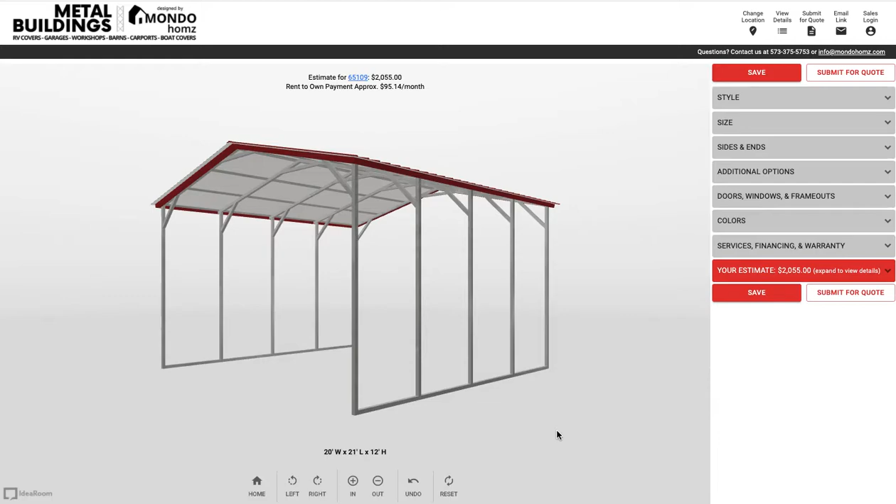Today we are going to build a 30 by 40 garage. Let's start up here with style. We can just start with a garage here, and it'll automatically populate a garage with 2 doors and a walk-through door. It automatically populates 24 by 26 by 9 - 24 wide, 26 long, from front to back on the roof.

Now, we have a 6-inch overhang on the roof, so the footprint is actually 24 wide and 25 deep. Let's change a few things about this garage. First, we want to make it a 30, so let's go to 31. That gives us a 31-foot roof measurement, which gives us a 30-foot footprint measurement. So it's a 24 by 30.

Actually, you know what? We said 30 by 40. So let's go to 30 wide, 41 long. That puts us at 30 by 40.

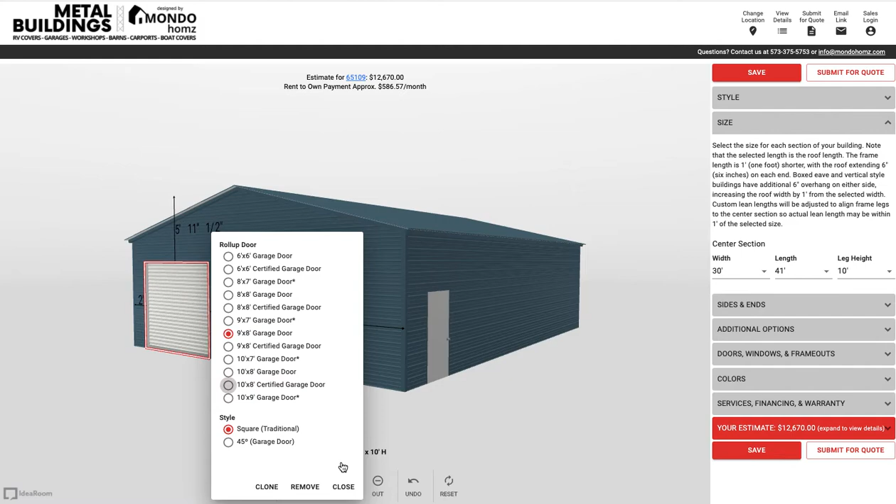Now I want to change the eave height on this. Let's go 10 foot, so we can change these doors to 10 by 8 certified doors. Okay, close. And then 10 by 8 certified door. Now we do the 10 by 8s, but we actually need 2 foot on the eave height for that certified door to make the header correct.

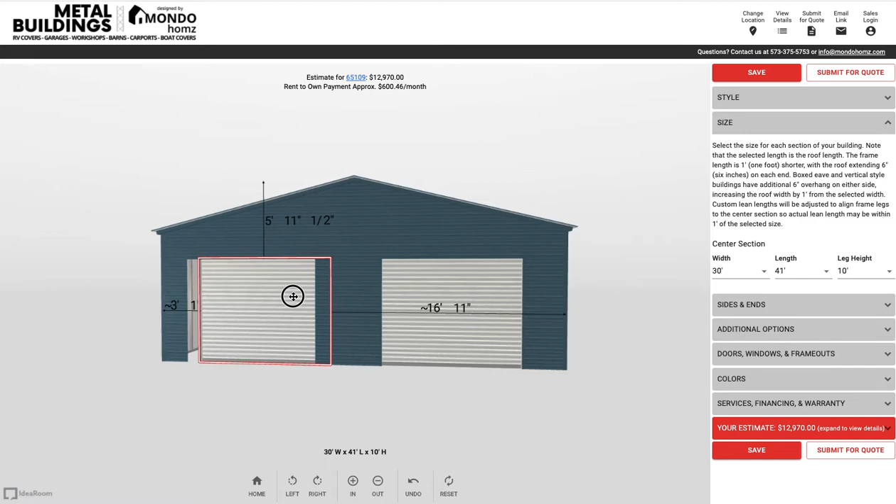I'm going to put, let's see, let's do 3 foot here, 3 foot and 3 foot spacing over here. So there we go, and we're going to keep that door there.

Now let's put some windows on the side here. Let's put one there. Normally when you do this, it automatically populates the window in the center, which is okay. Let's put a window on this side, and let's put a window on this side, that way we have good cross ventilation.

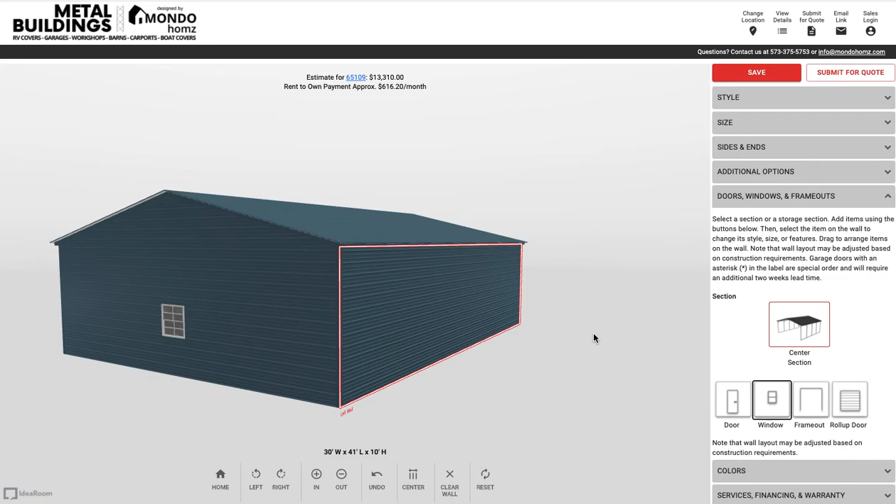Okay, so now, here we are. Oh, this thing is kind of getting wacky on me. There we go. Okay, so now here we are at the 30 by 41 by 10.

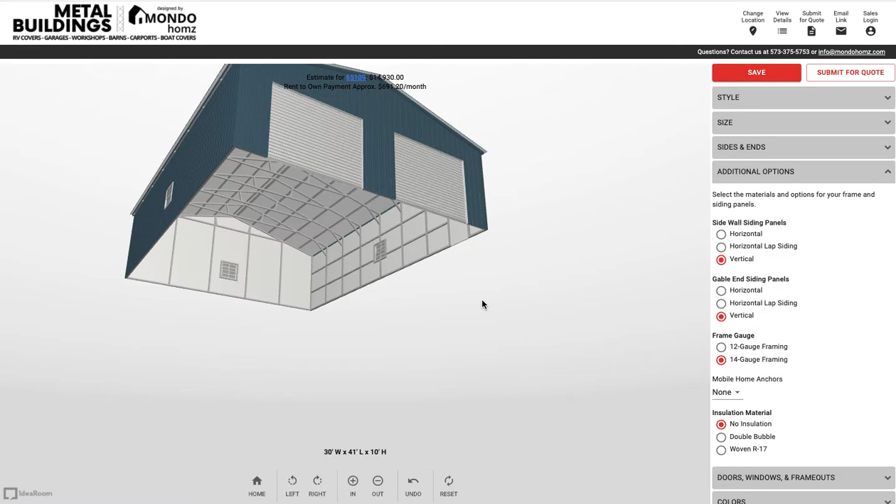But you know, I always like the vertical siding, I like how it looks. If you look on the inside of this building, in between the uprights, there is no purlins, but when we change it to vertical, those purlins appear. So you get more framing when you do the vertical siding as opposed to the horizontal siding. I like the look of the vertical siding.

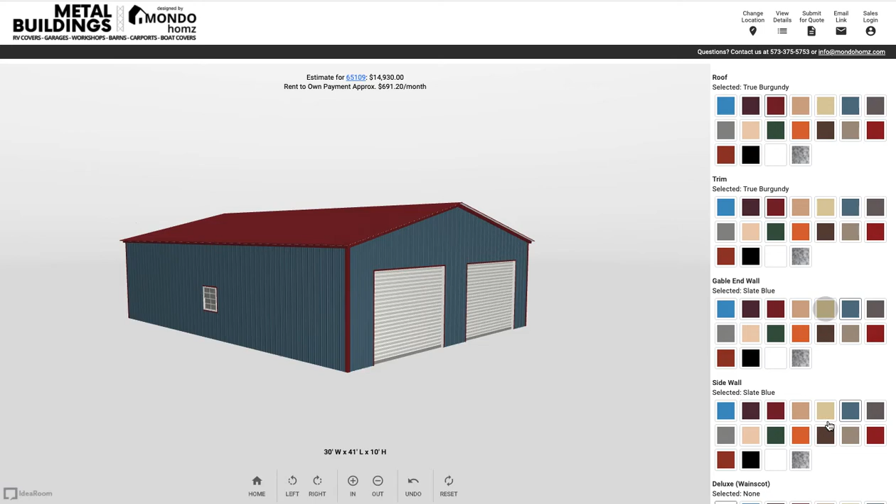Now let's go in and change the colors. Let's do - I like burgundy - and let's go with a sandstone and sandstone. And then something that looks really nice is adding the deluxe wainscoting, so the bottom has the wainscoting there.

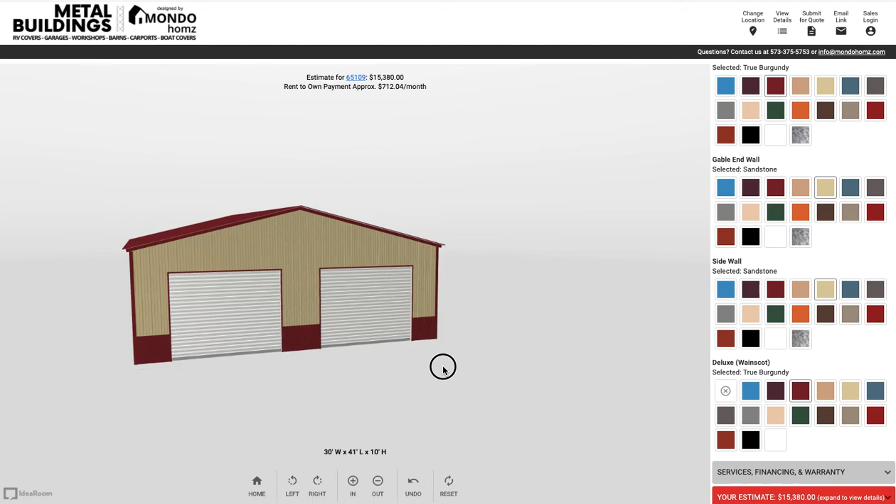And here's our building. You can see the door, the windows. It was a pretty simple build, and the reason it was simple is because we had the style up here, that garage style. It makes it really easy to build garages in here.

And you can skip around, you can go to the size, you can change the size, you can put lean-tos on this. Now, I've shown you in the past actually certifying a building, but all of our 30 wides, our triple wides, are automatically certified - they automatically have the wind certification and the snow load certification. So that's all automatic, but there you go.

There's a very simple 30 by 40 by 10 garage with the deluxe wainscoting, the vertical roof, the vertical siding, the 2 certified doors. And there you go, that's it.